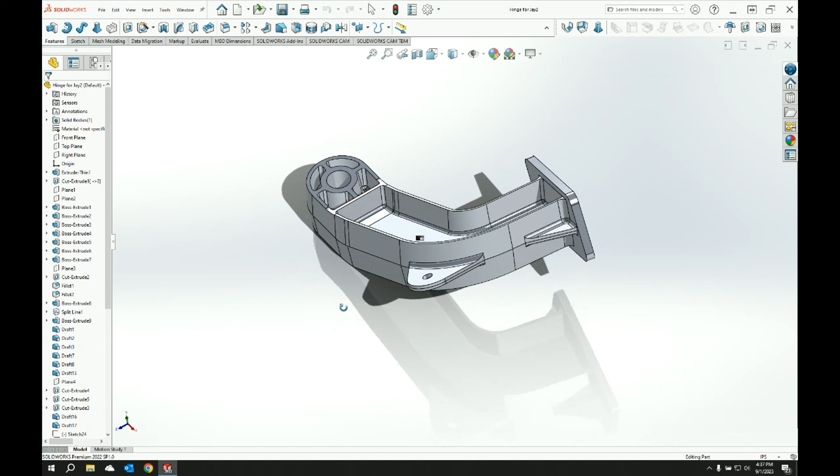This is the hinge design I've been working on for the cast aluminum door hinges. You can see here that I've added this plate. Eventually I'll drill 4 holes in this plate, and those holes will be where the door mounts to the hinge.

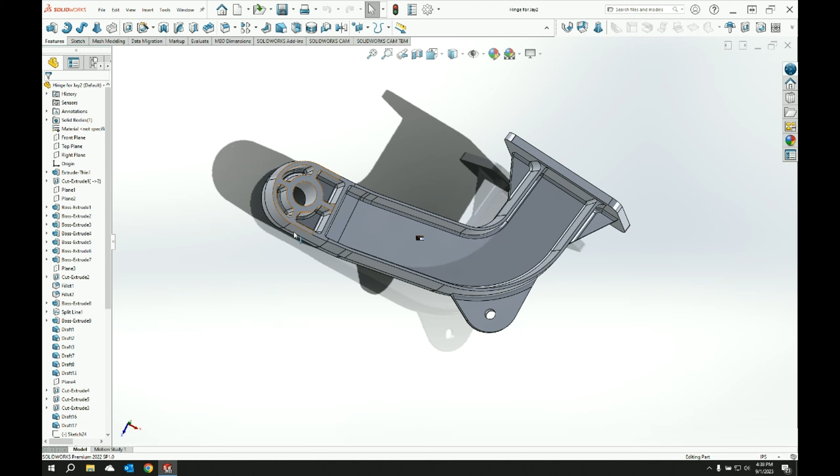This tab here with a hole in it is where the gas shock will attach to open and close the doors easily. This hole here will be reamed out and will have an Oilite bushing pressed in on both sides, and that will be the pivot for the door hinge.

I have this file ready to send off to another YouTuber. He's going to sand cast this one hinge out of aluminum for me. This hinge is for the driver's door. Once I get this file, finish it, and verify it's going to work correctly, I'll send him the passenger's door file to finish. I didn't want to waste his time making a pair of these until I knew for sure this design was going to work, so we're starting with just this one hinge.

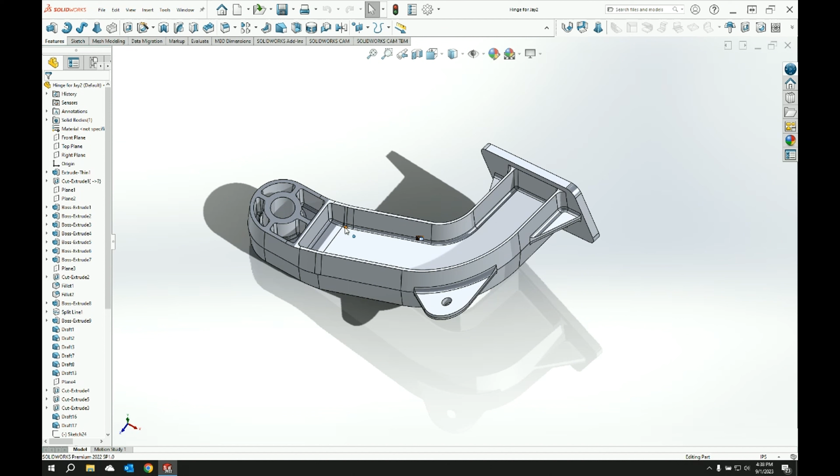I've also been working on the car's interior design some more. You've seen some of these pieces in last week's video, but I've been working on all of these pieces trying to finalize the design, or at least get them closer.

The subwoofer will mount here in this top area, and the bottom area here will have a phone charger built in. So you just drop the phone down in this pocket and it'll automatically start charging.

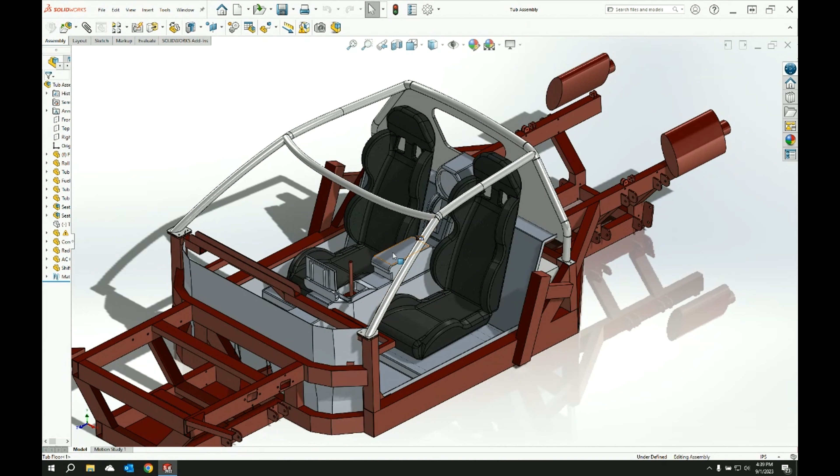I also purchased this console here in the center, and I've modeled it so I could get an accurate representation of the size, and design this center console around it.

I've also been working on this piece here around the gear shifter. I think I'm going to make this piece out of metal and possibly 3D print it. I'm still working on the design and it's not quite finished yet.

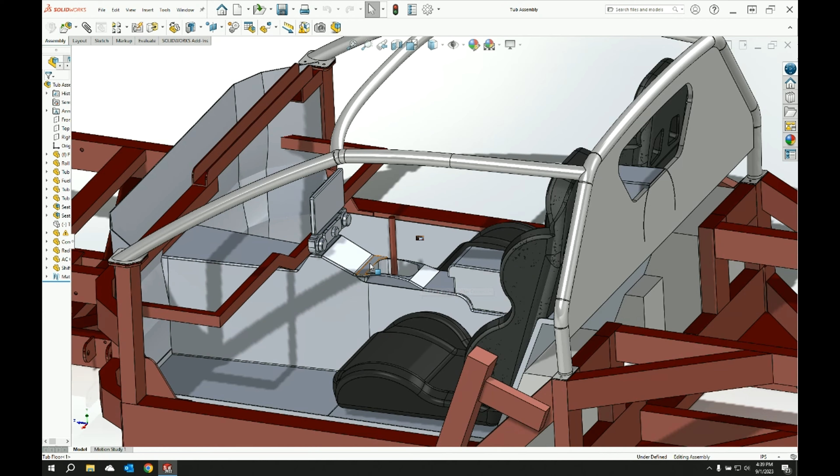Once I get this design finished where I like it, I'll go ahead and start working on the dash and the bezel around the radio and HVAC controls. But this is where I'm at on this, and I've made a mock-up of this console in the car to see how the size and shape was going to work in the car actually. So let's go take a look at that.

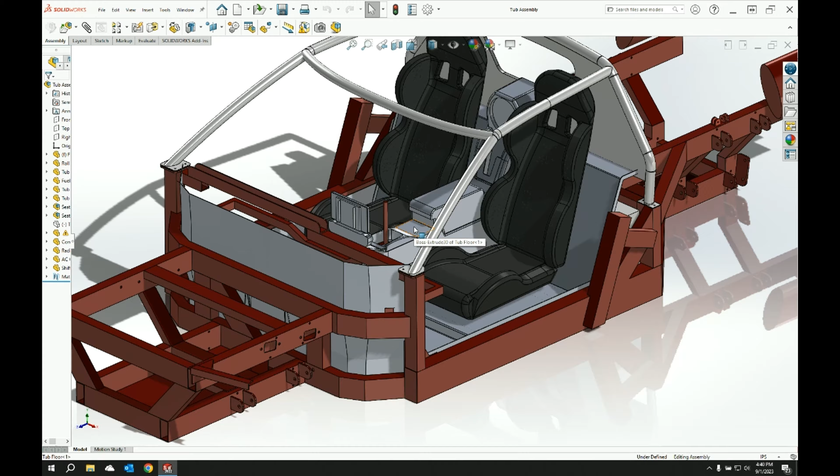Here's a mock-up I made out of paper for this center console. It's the exact size and shape, but it has square corners, there's no radiuses or fillets on anything. It's just a mock-up to see that the size and the contours seemed like it was going to work.

You can see here I fitted this console that I bought in. The center part will be made around this console.

The brake activation switch will mount here somewhere in this area. The start stop button will be mounted somewhere in this area, and then I'll have the metal part that I just showed you on the computer here in this area, and this metal part may come on up to here or back to here a little ways. I haven't decided on that for sure, but this seems to fit pretty nice in here.

I'm happy with the shape and the size overall. You can see here I have the radio monitor and the HVAC controls sitting pretty close to where they're going to mount, and all that'll be blended in nicely once it's finished with a trim panel.

I haven't decided yet if I'm going to use a gated shifter or a leather boot like a more modern car has. I like the look of the gated shifters, but I don't think I'll be able to put something around this handle to make it trim in and fit and look right with a gated shifter, so I'll probably go with a leather boot cover on that.

I'm starting to get a collection of things here for the radio. You've seen most of this, but there's a few more parts that came in since the last video.